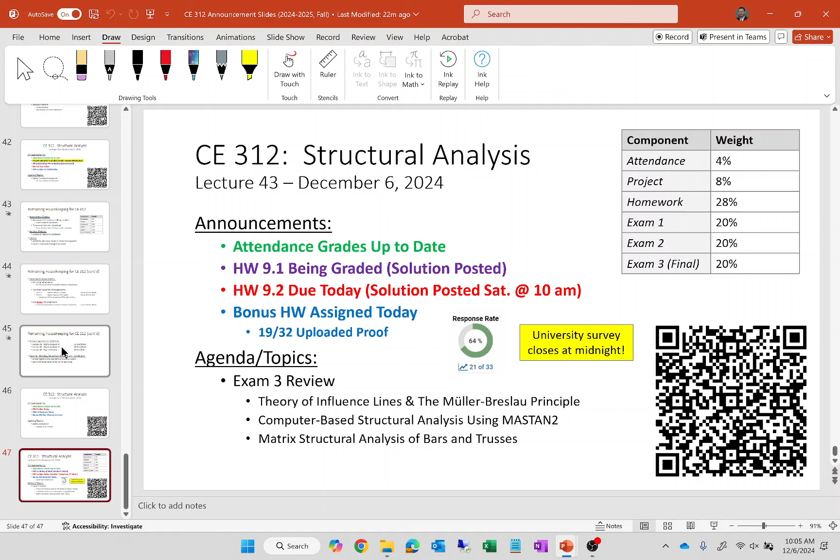Let's talk about the final. A couple things about the final, and I want to make a point about something that I did. I am not going to add topics on the final, but I have decided to add another problem, and I'm going to tell you why. My main reason is not to penalize you. It's actually the exact opposite. It's meant to help you.

One of the biggest topics on the final is influence lines, right? That's the biggest thing we talked about since the second exam. And influence lines are very difficult to assign partial credit if you get it wrong, because you all remember, you sort of just draw it, and it's either right or it's wrong. So I don't want some really big problem on the exam that you either get right or wrong, because it leaves very little room for partial credit. But if I add another problem, that softens the blow on influence lines. So that's what I've decided to do.

It's still not going to be a time-sensitive exam, and when you see this additional problem, I'll admit I even have a hard time calling it a problem, because it's much more conceptual than computational. You'll see what I mean. It's definitely not anything to stress about. It's a pretty straightforward problem.

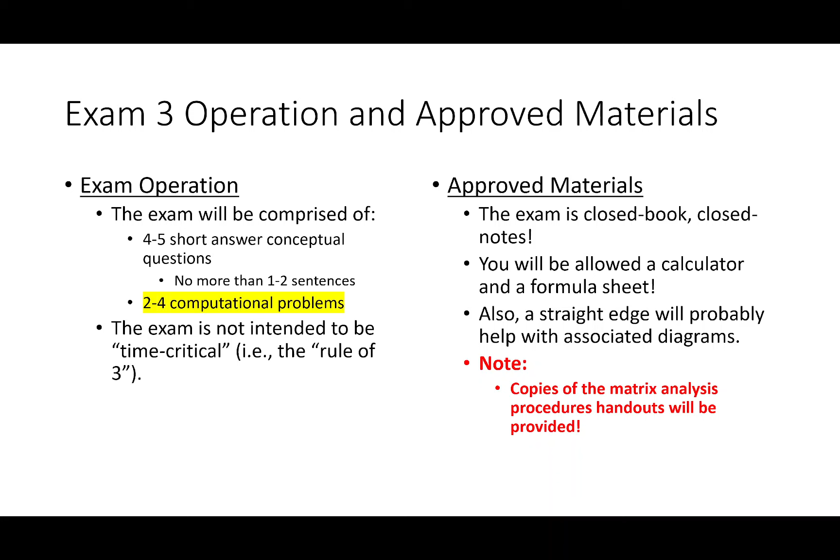So I don't want you to waste time on your formula sheet putting that stuff on there, because I'm gonna give you that, okay? Does that sound good? Okay. All right, so again, the big thing that I say about the formula sheet, I just want you to make it. Take some time and make it. Don't just copy and paste slides. Again, I think that will more or less injure you in your preparation for the final, because by making the formula sheet, you are studying. So I want to see you do well.

Okay, let's talk about what's on the final. What's on the final is basically everything that we talked about since exam 2. We've basically talked about 3 things in this class since then. We've talked about influence lines, which is a big topic on the exam. But then we've talked about MASTAN, and we've talked about matrix analysis.

You are not going to need to do a MASTAN analysis on the exam. So this isn't going to be like bring your laptop and do a MASTAN analysis. It's not that. I might ask you questions about MASTAN, but I'm not going to make you break out your computer and start performing structural analysis. Does that make sense? So no MASTAN analyses. This is all just pencil and paper, okay? All right, so the topics.

Influence lines. Make sure that you can draw an influence line. And so by drawing an influence line, what did we do in here? We drew influence lines for vertical support reactions. We drew influence lines for shears and moments at a given point. And we drew influence lines for fixed supports in terms of reactions and internal response. Be able to use those influence lines to determine worst case responses, specifically due to concentrated loads and distributed loads.

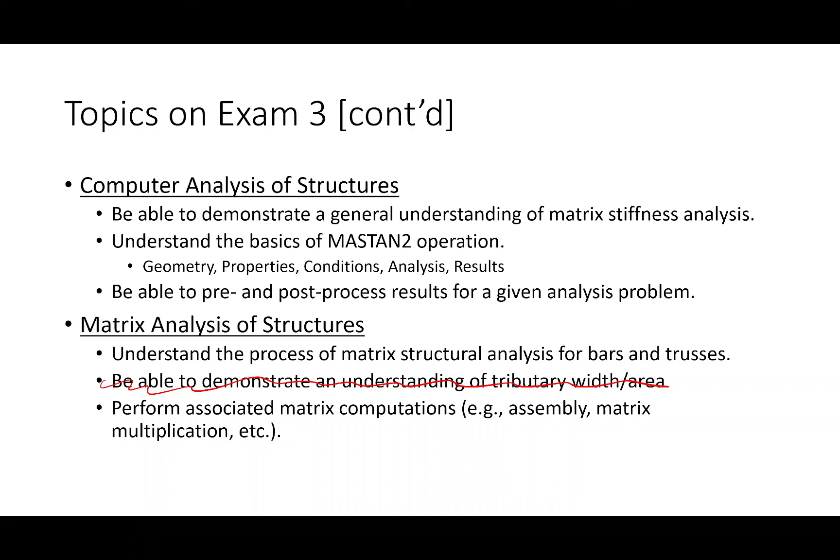In terms of what's left in this slideshow, everything else is just sort of relevant stuff from the past few lectures. So for example, influence lines first. So influence lines, remember, for drawing for reactions, we have a few rules that we can use. So remember, influence lines are linear for determinate structures. This is a determinate structure.

How do we know it's a determinate structure? Let's pop quiz that one. How do we know that's a determinate structure? Y'all remember this? How about this? We have 4 reactions, right? We have 1 hinge, right? So it's determinate, remember that?

If you have a determinate structure, the influence lines are lines, okay? They are linear structures. The reason why, there's one reason that can be stated about 50 different ways, but the way I like to describe it is if I remove one of those supports, the structure becomes unstable, and unstable structures don't flex into form. They just kinematically, boom, they just go. So, for example, if I remove the roller at C and lift point C up, it doesn't flex or bend, it just lifts up like this, okay?

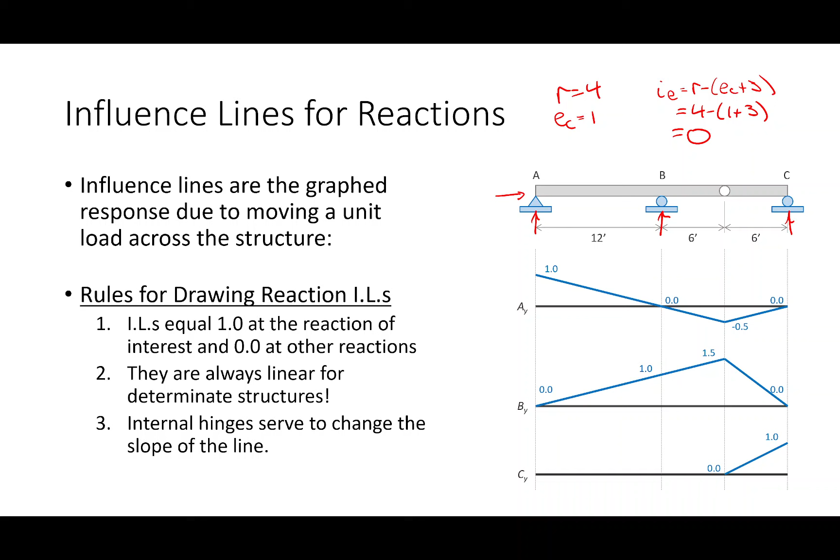Linear everywhere else, and whenever you have an internal hinge, it just changes the direction of the line. So we have an internal hinge between B and C, so for every influence line you can see a change in slope, change in slope, change in slope. For shears and moments, we put either a shear release or a moment release at the point in question. And so for moments, we basically just pick that point up some height such that this slope plus this slope equals 1. I think moment influence lines are actually easier to derive.

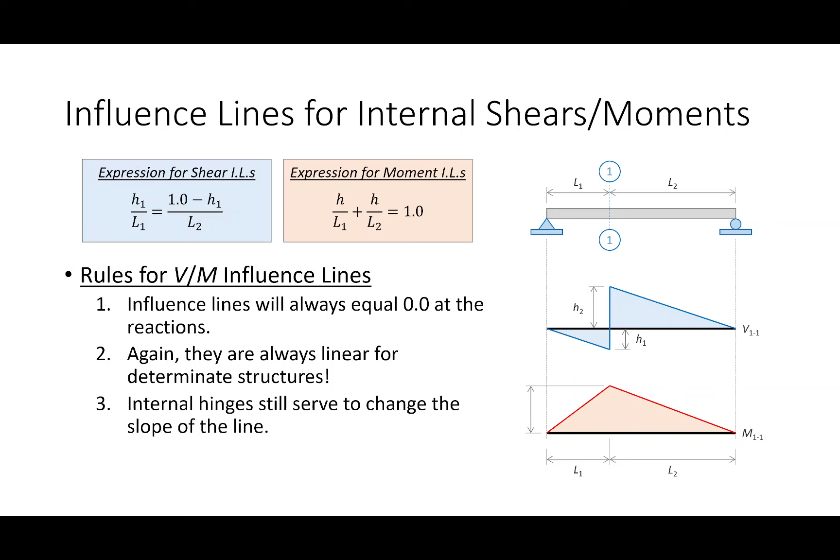For shears, we mark the left side tends down, the right side tends up, and then the idea is that these two lines have the same slope, and the sum of that displacement is 1, and so you just have to solve that out. Again, they're linear, and again, hinges still serve to change the slope of the line.

For matrix analysis, the way that MASTAN works and the way that this works, the first thing that we do is pre-processing. So this past week, we haven't actually had to do any pre-processing because I give you a homework problem and the pre-processing is already done, right? You know what the geometry, the loading, and the stiffness of the problem is. Like homework 9-1, I gave you all that. Whereas in MASTAN, you had to go in and actually create the nodes, the elements, the materials, the sections and all that. That process is called pre-processing.

Now in MASTAN, you click a little button, MASTAN does all this hullabaloo inside, and it just gives you the answer. So pre-processing is creating the model, and post-processing is reporting and understanding the final answer, like plotting the shear diagram, plotting the deflected shape, recording all the responses and things like that. But we now know after this week and a little bit before break what's happening when you click that analyze or solve button.

MASTAN is sort of operating in a 4-part sequence. I'm not talking specifically about the code inside MASTAN, but all matrix analysis solvers tend to operate like this. The first thing it's going to do is write the spring matrix, or the K matrix, for the whole system. It writes a stiffness matrix for each member, and then it assembles it. In the case of a truss, we have to map that stiffness matrix to global coordinates, and we know how to do that now: we take T transpose times K prime times T before we assemble. So we assemble the K matrix and the F vector.

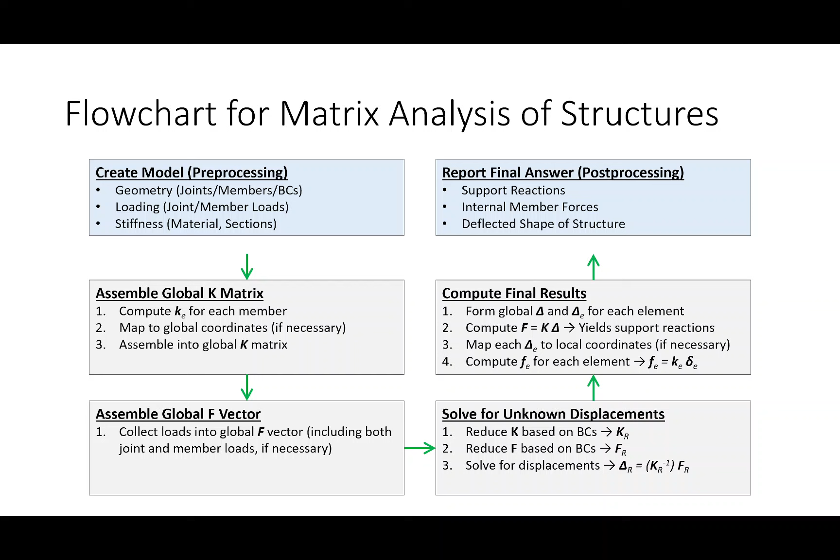In terms of matrix analysis, this slide is probably common to both Mastan and this. First off, our terminology: we know that we're using the terms joint and node interchangeably, and we are using the terms member and element interchangeably.

For units, matrix analysis doesn't care about your unit system. So what that means is that whenever you're starting the problem, everything needs to be in a consistent unit system before it starts going through the flowchart, okay? And so in USCS units, I typically recommend that your forces need to be in kips and your displacements or your lengths need to be in inches, okay?

For the sign convention, because we're doing this in a matrix type procedure, we sort of have to adopt something consistent and just go with it. So we're going to say forces and displacements to the right are positive. Anything going upward is positive. The rotations don't really matter for bars and trusses, so we can ignore that. But axial forces in truss elements, we've been saying tensile forces are positive.

And this one comes into play because whenever we get to the very end of the bar problem or the truss problem, we just look at the second number of the truss element, and if it's positive, we say it's tension. If it's negative, we say it's compression. And if we said compressive forces are positive, we would either flip that sign convention or maybe look at the other number.

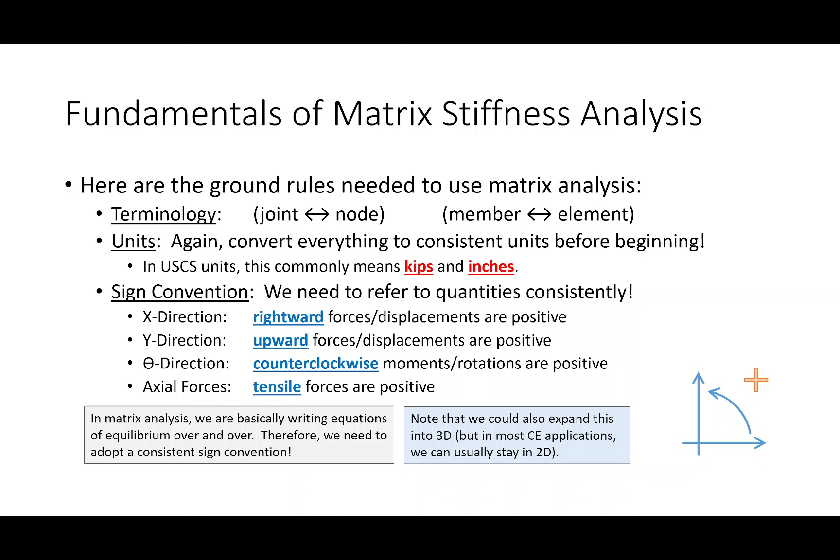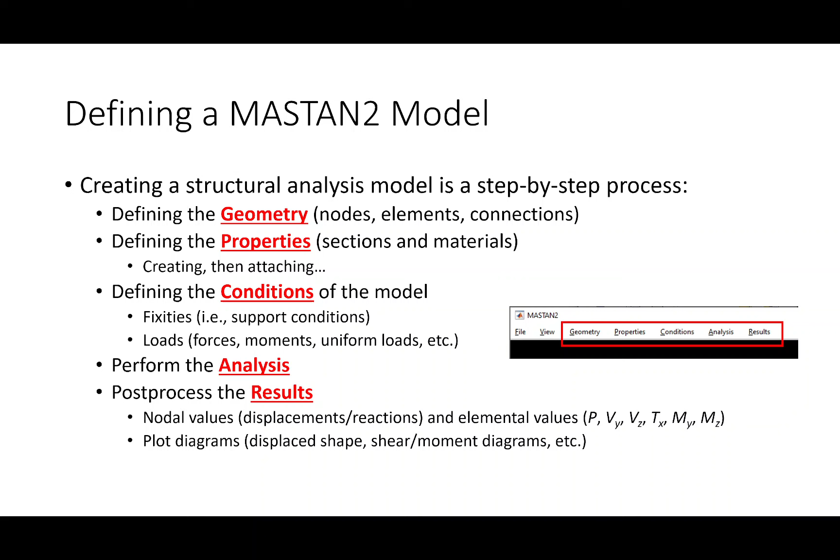Here's some guidance on nodes and elements. Nodes are where the software will directly compute deformations, and in matrix analysis everywhere else you interpolate the displacements. So where do you put nodes? Put them at the supports, at the hinges, at the truss joints, at point load locations, although that's not 100% necessary, but I'm getting down in the weeds of matrix analysis land. It is in Mastan. And any other point of interest.

Elements: the way matrix analysis works is a model's broken down into discrete solution regions called elements. And when we get into more advanced problems, the number of elements affects your final answer. The way I like to explain that is if you had a function in a math class that looks like this, and we wanted to idealize that with straight line segments, using one segment would be a very bad approximation. But if we used, let's say, 3, suddenly the idealization gets better.

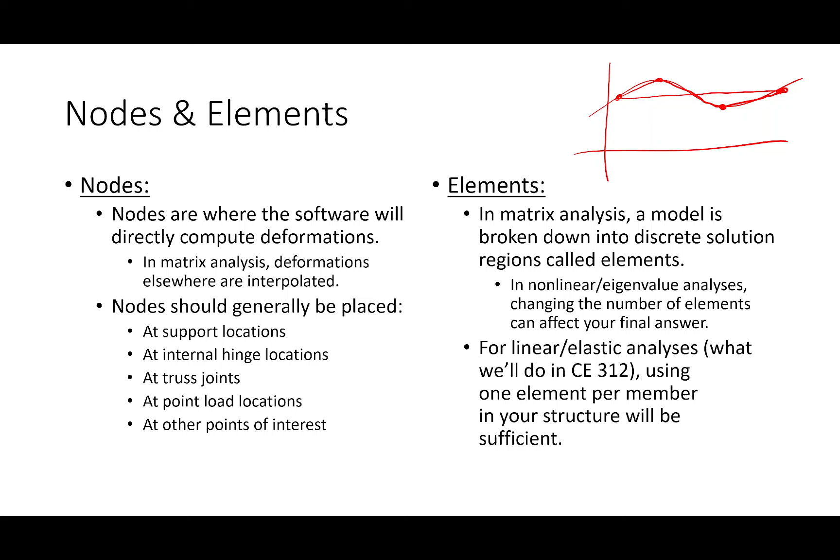So if the problem is nonlinear, the number of elements matters. But everything we've done in this class is linear. So how do you approximate a linear region? Just use one element. So we would never need to put multiple truss elements per member.

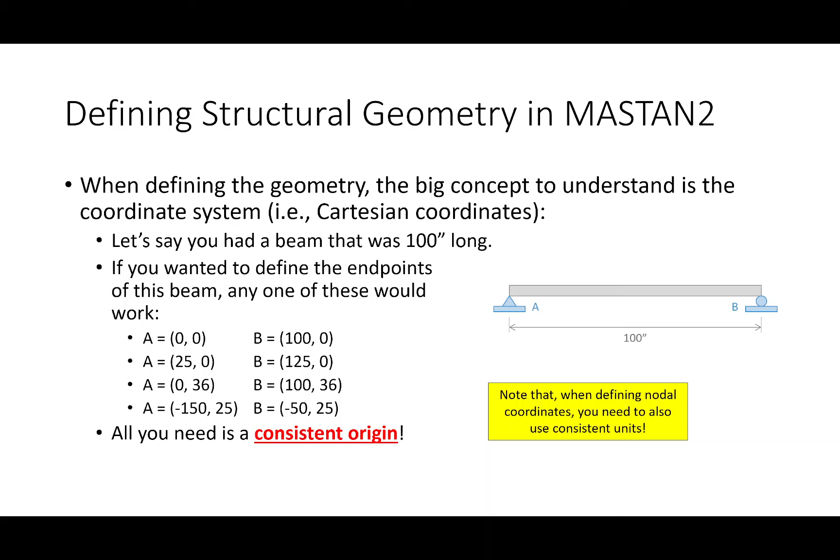In Mastan and in matrix analysis, whenever you're defining the geometry, the only thing that matters is you have a consistent origin. So if you had a beam that was 100 inches long, this could be 0, 0 and 100, 0. This could be 25, 0 and 125, 0. This could be negative 150, 25 and negative 50, 25. Because the solver takes the change in x and the change in y to compute sines, cosines and lengths, so it's not going to matter. You just need a consistent origin and consistent units.

The only other stuff I could put in this slideshow, I chose not to because it's on these matrix analysis handouts, like the process for bars and the process for trusses, so I thought it would be repetitive. That's the exam.

So I'm going to shut up now for a little bit and turn it over to you for questions.

Nobody has questions? Am I getting off easy? I could bring up some MATLAB code. You don't want me to bring up any MATLAB code? Oh. You're just such a good teacher. You just don't have any questions.

Is it that, or is it just, as we were talking about before class, well, let me ask it this way. How many people in here are just about done this semester? Just, we're here, we're just done, ready to go home, realizing that the best invention ever is the Snuggie, because you can just sit on your couch and break out the Nintendo Switch and play Zelda for a month. What's that? Those are your plans? It's awful